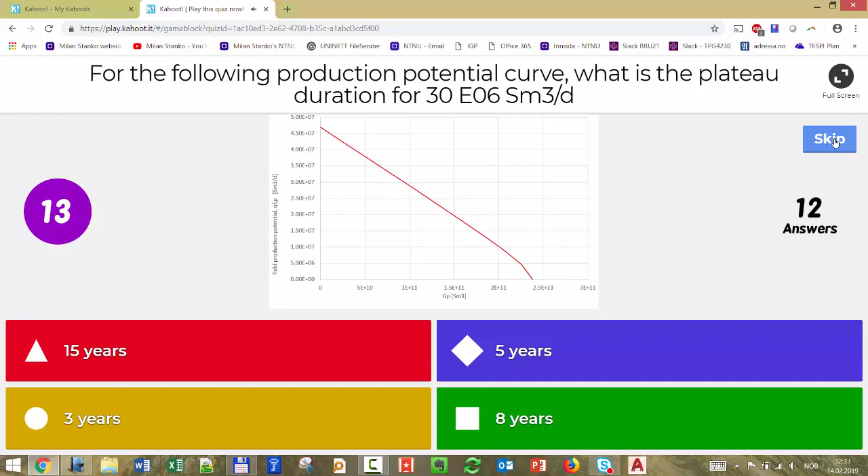Wow, very different results. Okay, so how do we solve it? We have that curve, right? For finding each one of these points, we came to that production. Let's say we produce 5 from the reservoir. We calculate reservoir pressure, and then we run a full open choke, the maximum that system can produce. That gives me that point.

Now I produce a bit more, I have another reservoir pressure, make flow equilibrium, and then I calculate that point, and so forth. I always have to compute for each cumulative production, for each reservoir pressure, the maximum the system can produce. That means the rate that I want to produce, 30 million, is reached when the system has produced this amount, which is like 0.8, 0.9 E to the 11. That's when the system can produce maximum that number.

After that, if I continue producing and reservoir pressure keeps declining, I won't be able to achieve 30 million any longer from that point on. So to find the time, you have been producing that value constantly, uniformly, along all of those years. So you simply divide 0.9 by this number, that gives you the number of days produced, and then to find the number of years, you divide by the number of days in a year. Okay?

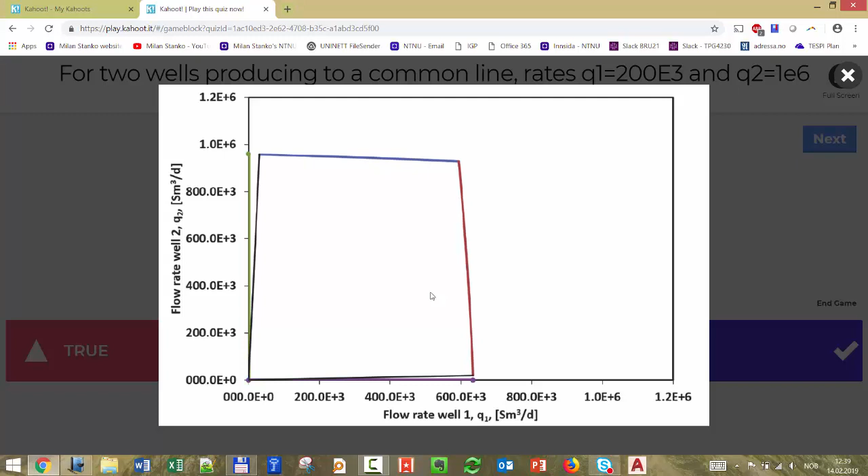Okay, it simply comes from the equation. When the flow rate starts to be too small, you have a discontinuity. You are not able to find a solution for those low rates. That effectively means the well will close when you reach a certain low number. That happens for some systems when you're solving the system of equations, so be aware of that.

Okay, so let's see who was the final winner. Buyan, Sage, and J.A. I don't have any prizes today, so sorry for that.

Okay, so now for the second part, you're going to get an exercise. You should work in groups of, I would say, three. But first, we took a recap Kahoot quiz, and I just want to clarify something that people were a bit confused by: problem 2 of exercise set 2.

You got an equation that was simply the Q production potential of the field, equal to the number of wells times minus M GP plus Q PPO, and you got some numbers for here and here. This is exercise set 2, right? Exercise set 2. Yeah, set 2. That's correct.

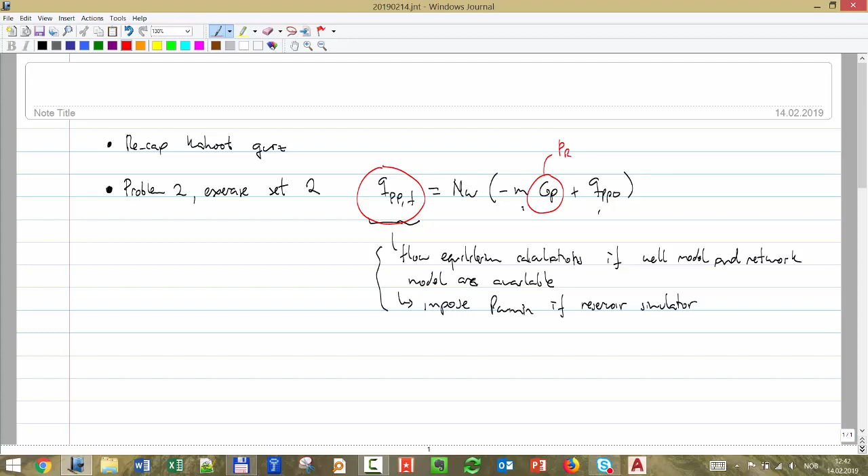You don't have to make flow equilibrium; I have made it already for you. I ran it for a lot of PR and found how much that potential rate was. When you are in the plateau period, the rate of the field will be constant, and you can find the end of the plateau. You already know how to do it, right?

So you have here GP, just the exercise we have made here. Now for subsequent times, you know you're going to be on the line. One way to calculate that, I suggested to some of you, is to take GP. GP at any position i will be GP from the previous time step plus, using the trapezoidal rule, 0.5 times QI plus QI minus 1, times TI minus TI minus 1.

So you start exactly at the end of the plateau. You have time and Q of the field, you made your plot until TP, and then you want to find the rate QI at this time TI. You have Q from the previous step, which for this case will be the plateau. You have the time step you chose.

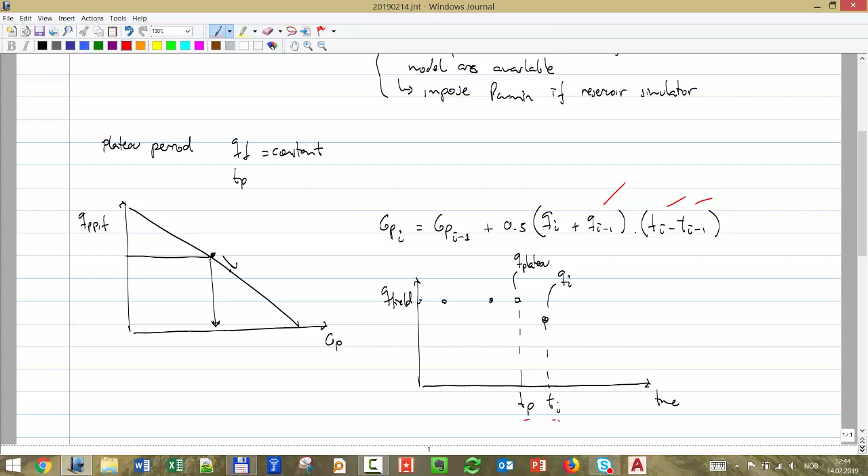You decide: you're doing your calculations every year, or every month. You have how much has been produced, GP minus 1. But now you want to find these two. On top of that, you have another equation, the potential equation, because in this area you always have to be producing at the maximum.

For that, the maximum Q of the field should equal the number of wells times minus M GP plus Q PPO. All of these are given. So you have one more equation for that point, where QI is NW times minus M GPI plus Q PPO. Then you solve that system of equations, one equation here and another here, simultaneously.

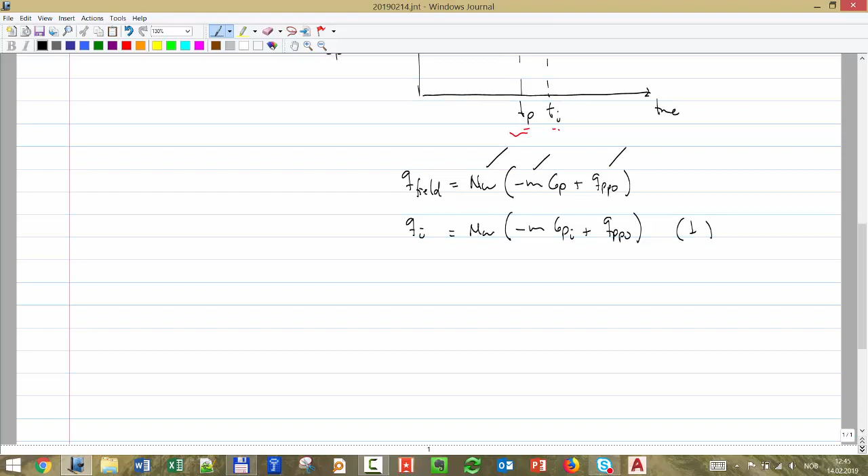Now there is another way you can do it. You can use exactly the same approach we used in problem 1 of exercise set 1. You have time; at some point you have T plateau, and then you have TI.

So you can compute the GP. First you have the rate, right? And for all of these, you will have the plateau. Plateau, plateau, until here. Now you have the GP. Okay?

And for GP, for time I, you can calculate, assuming that you have been producing the previous, so it will be your previous plus Q plateau times TI minus TP. You are assuming that you are producing that throughout the year with the rectangle rule, from the end of the plateau. Even though you are sure it's not so correct because now your rate will be less, it's just an approximation. You're assuming it will remain constant.

With this GP, you're also able to calculate the Q production potential of the field. And you had one column. For that you use this equation. So for 0 GP, you calculate some QPP of the field until you reach a point, right? So when you apply it exactly for this time, what's going to happen? Your plateau rate will be above this potential. So therefore, you should use now, in this time, that potential.

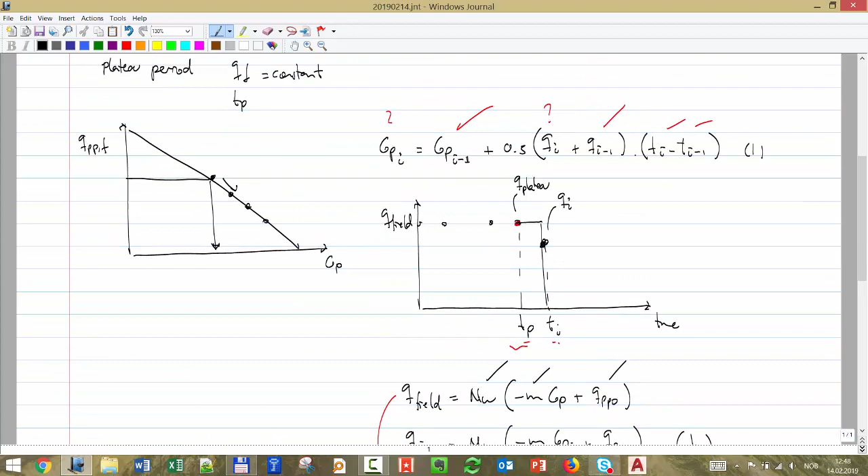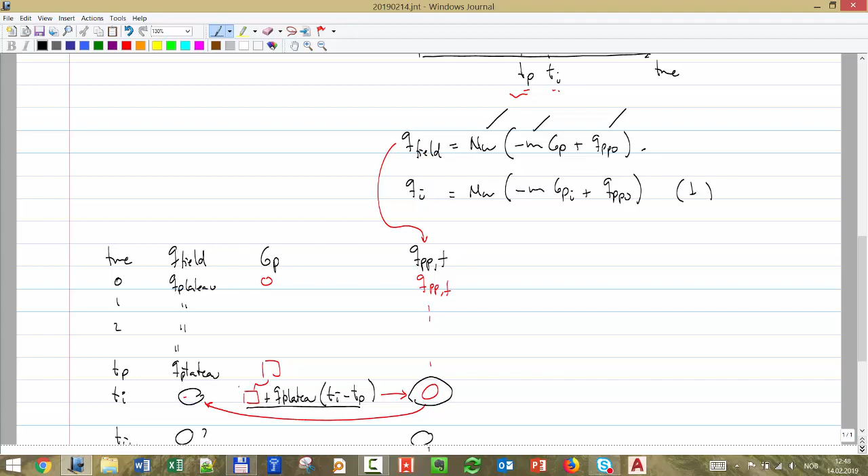You don't have to solve this system of equations. You can just assume that the flow equilibrium calculation, applying the minimum bottom hole pressure, simply comes from this equation. I don't have to solve anything, I just apply that equation. Okay.

With that clarification, we come to the second part of the class. We are going to make an exercise, which is published on my website. Well, you're going to make an exercise. I'm going to help you a bit. And that exercise is part of exercise set 3.

So what we have here is a very complex problem. It has a part on boosting. It has a part on flow equilibrium calculations. It has a network, and it's also in time. So it has all the things we have covered so far in the same problem. So we have to take one step at a time.

What we are looking at here is the Gullfaks South field. You have two templates, M and L. You also have another template called N. We are neglecting that template for now; we say the production is very, very small, so we neglect it, such that we can solve it with Excel.

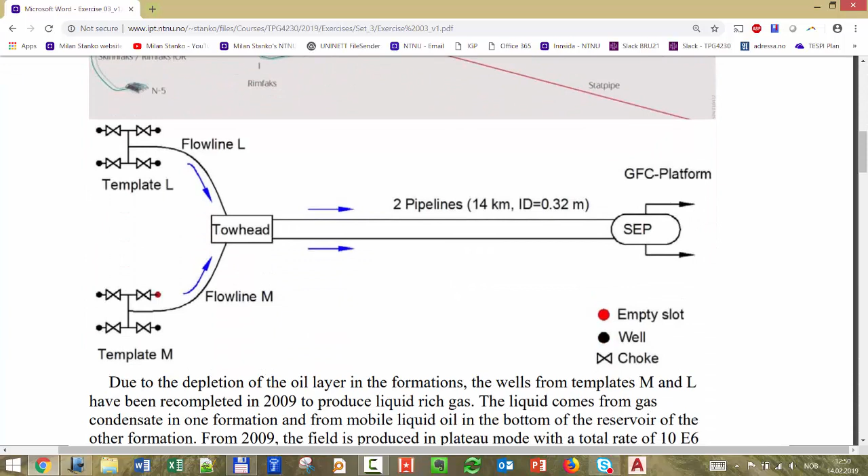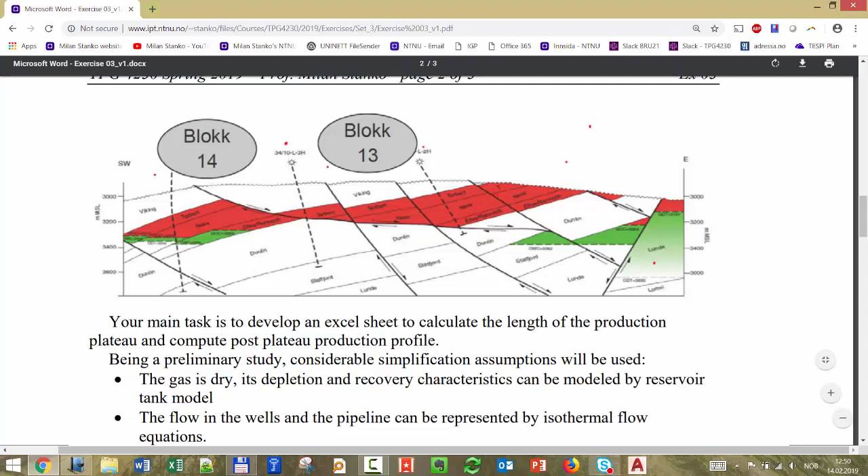And the thing is that these wells were originally oil wells. But with time, the GOR starts to increase, you're producing too much gas, and they decided to convert them to gas wells, gas with some liquid. So if you see here the cross section, you have 2 units split by a fault. Initially the wells were completed in the oil layer, and they were recompleted a bit higher in the gas layer.

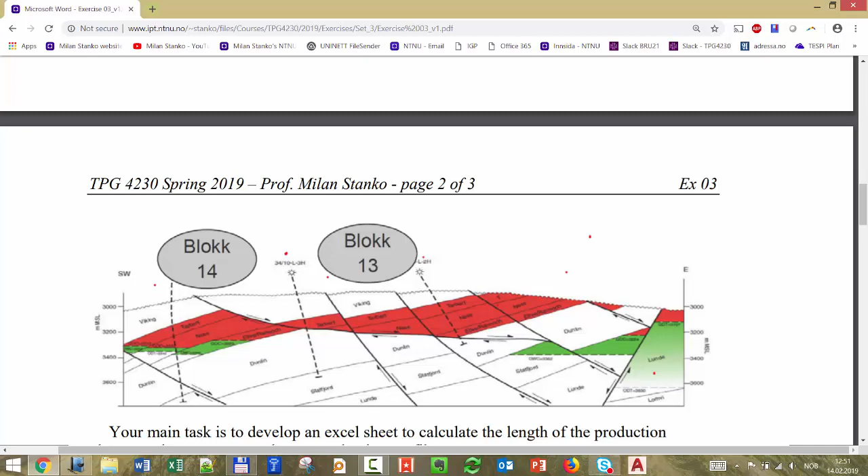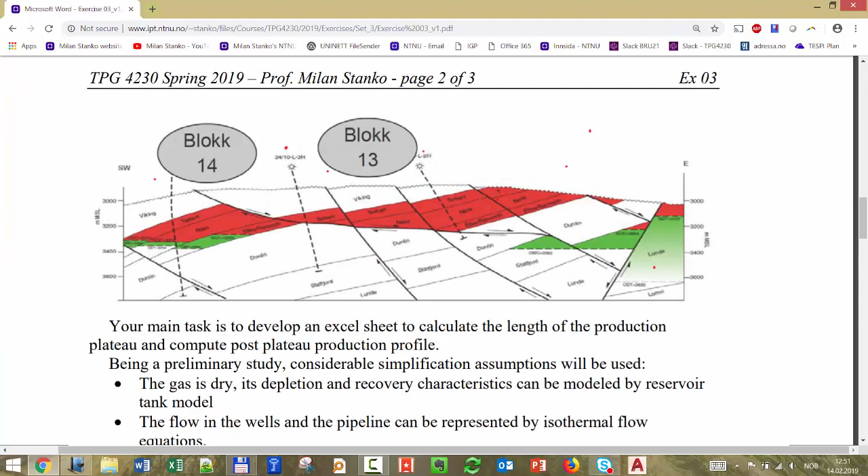And you will start your calculations from there. You have the volume of the gas cap you have in place, and each well is draining from a different unit. Even though it's a very complicated unit, we say these are 2 reservoirs, 2 containers. And the main task is to compute what we are computing all the time, which is the production profile. You can use the same equations, dry gas material balance.

This is all the data. Now you have two reservoirs. So you have to take the volume of each reservoir. You have to take the number of days producing per each reservoir. You have a different number of wells per each reservoir, different initial pressure, different C, tubing, flow line, etc.

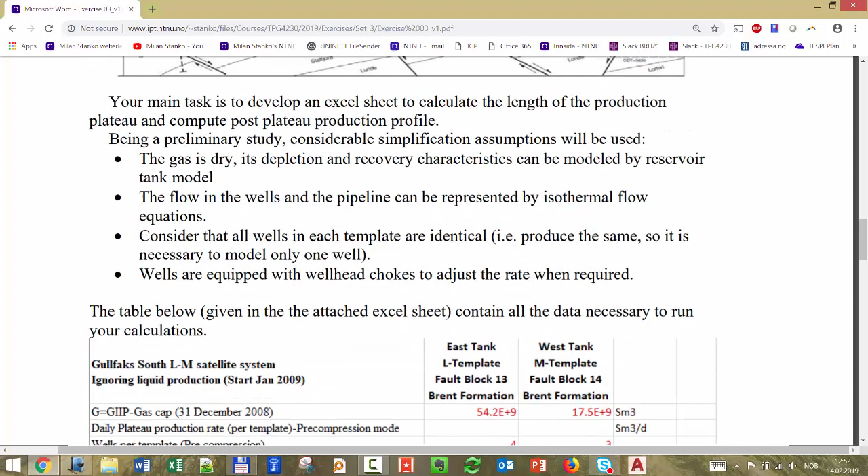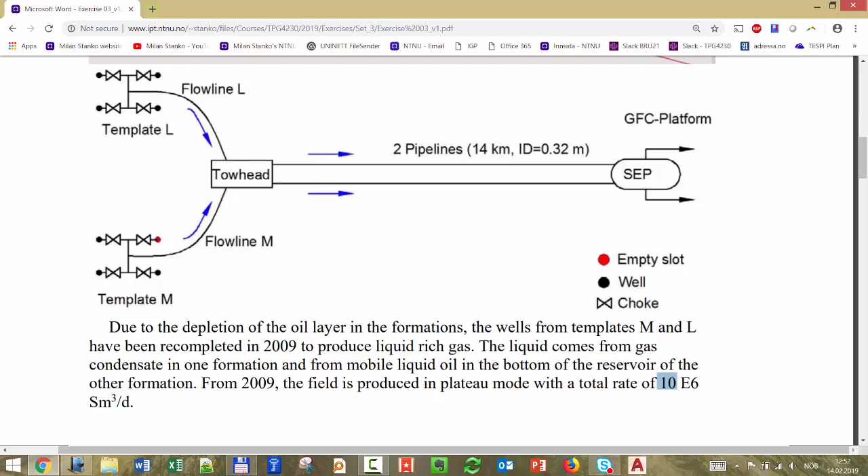Now, there are a few things, so you can go and read. I suggest you have groups of 3, and then you work on the exercise, and I can help you as needed. But basically, if we make a simple sketch of our system, you have here a flow line. I don't need to simulate both. Both are going to be exactly identical, so I can say I have a flow line that is carrying half the rate of the field. If both are identical, there is no point to waste one equation on that. I know the conditions will be exactly the same.

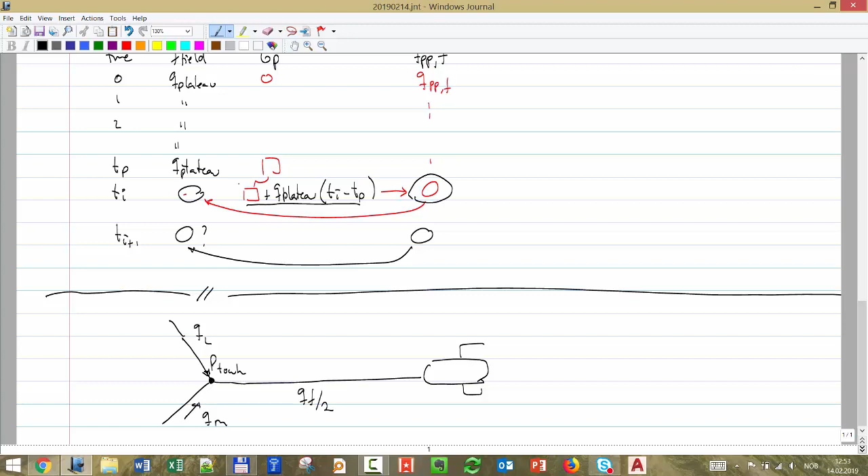So here I have P towhead, and then I have 2 templates, and now the rate won't be the same. Now I have Q of L and Q of M, and I have to find how much that is. And then I have 4 wells, I think, in L, and 3 wells in M. Here we make the assumption that wells are identical within a template. That means the rate on one well will be QL divided by 4, and this will be QM divided by 3. Just to not solve too many networks.

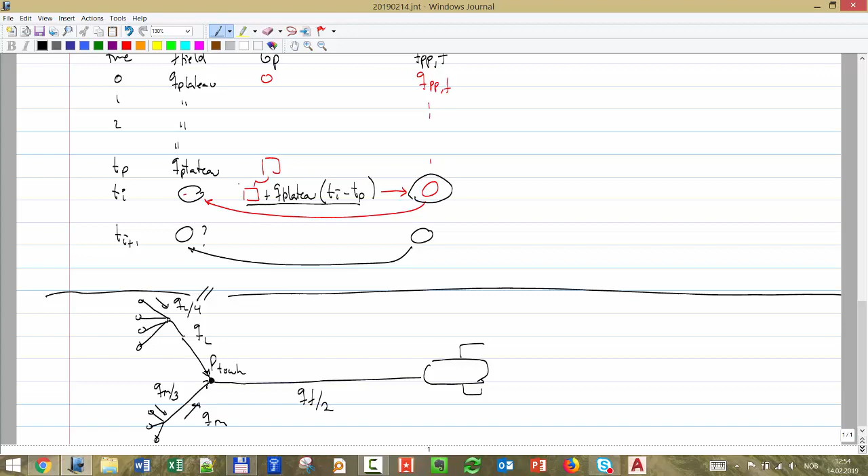Here the main thing we want to calculate is the splitting between these 2 units and how they're going to deplete in time. So we don't know yet how much we're going to produce from every unit, from each reservoir. It's empty. So I suggest that first you run an open choke simulation.

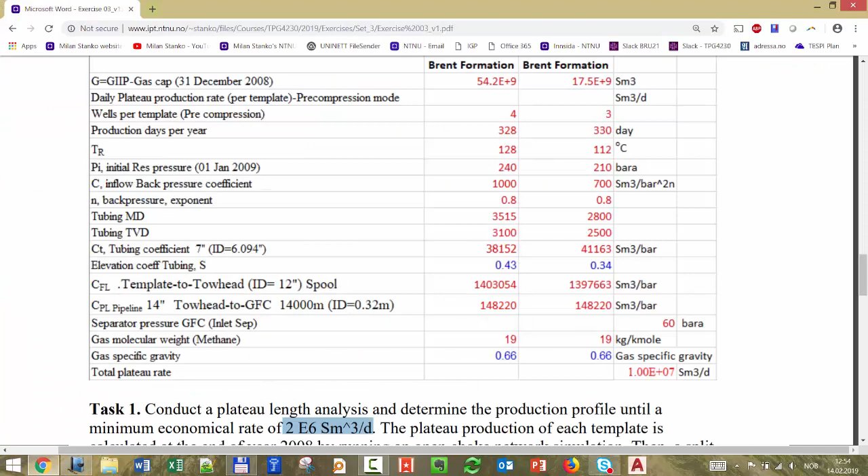Okay. For the plateau production of each template, you have to run an open choke simulation. It should give you a value much higher than 10, maybe 20. You will see how much each template is producing in that case. Maybe one template will be 12, the other 8. Then you calculate a split factor for each template, for each reservoir: let's say 12 divided by 20, and 8 divided by 20. So you calculate a factor for each one of them.

So to estimate how much each reservoir unit should produce in plateau rate, and that's something the field designer does often, they make the decision based on the potential. One often uses the potential. So I calculate at time 0, when I haven't produced any gas. I have been producing that reservoir for a long time, but I haven't produced any gas. At time 0, run a flow equilibrium calculation with open choke.

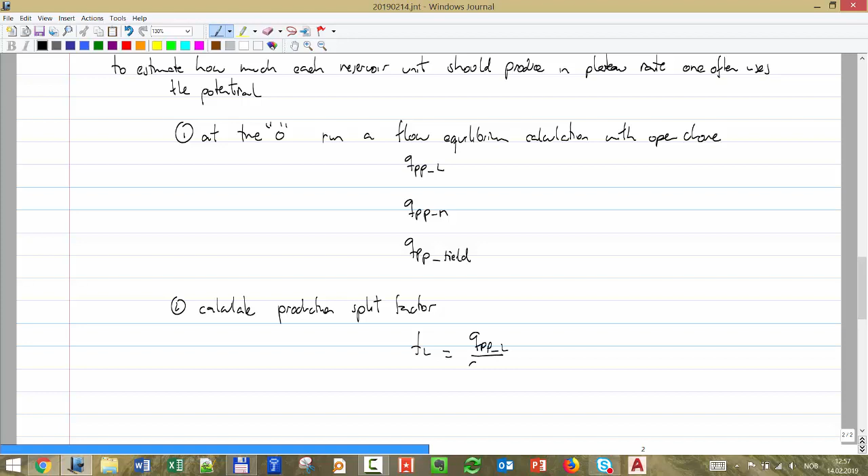Then I calculate the production potential of template L, the production potential of template M, and the production potential of the field, which, if I want to produce 10, should be much larger than 10. That's the first step. The second step is to calculate the production split factor, where for L it will be QPPL divided by QPP of the field, and for M it will be QPPM divided by QPP of the field. And I'm going to get a factor.

Let's say according to the productivity of each template, one will be 30%, the other 70%. So the third step is to calculate the production split at plateau rate. Q plateau of L will be the desired Q plateau of the field times FL, and Q plateau of M will be the Q plateau of the field times FM. If I produce at open choke with no restriction, I get that splitting, so I use the same splitting when producing at plateau rate. That's how you find out how much each template is producing initially.

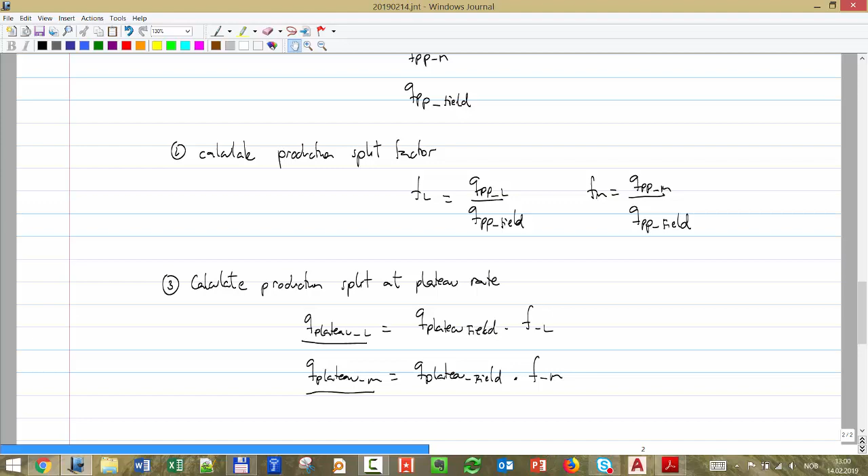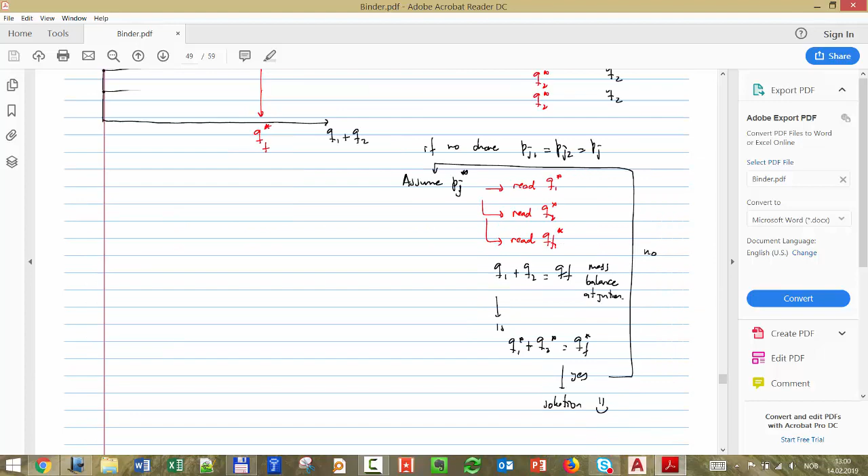And now we go to this. To solve this problem, you think about network, you get scared, I have to solve a system of equations, but remember this very important lecture. If we are at plateau rate, if the delta P of the choke is positive, I simply calculate with the rate the wellhead pressure of template L. With the rate, I calculate the wellhead pressure of template M. And with the rate, I calculate the towhead pressure, and then at the template the required and the available, and I compare.

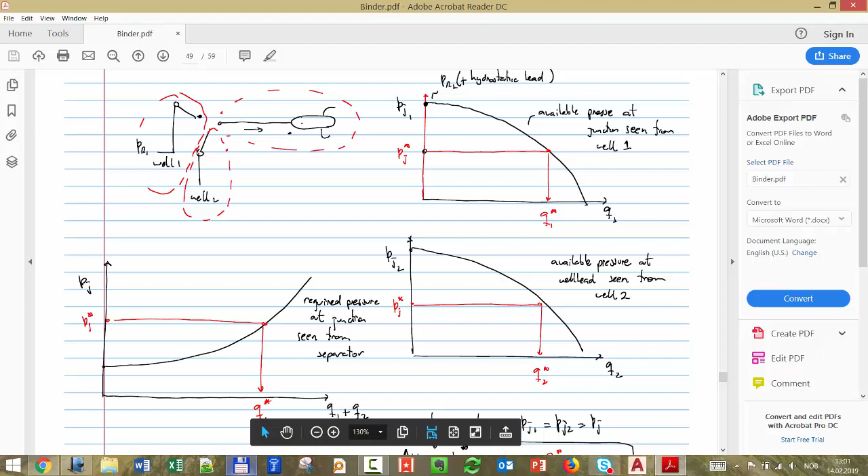If one is greater than the other, that means I can produce the rate. I don't have to do anything else. I have verified that I have more energy than what I need. The problem comes if it's not, I have to run equilibrium, if I have less energy than what I need. So for that you got an Excel sheet that you're going to use, and it's very similar to the one for Snow White.

But now you have two reservoirs. So you have the rate of the template, the rate of the well on that reservoir, the GP, how much you have produced from that reservoir, the recovery factor, the C of that reservoir, reservoir pressure. So with that rate, you fix it. Let's say it's initially 6. You have reservoir pressure, you calculate bottom hole pressure, and then you calculate wellhead pressure. You stop.

Now, this you don't know yet. That's the available, and this will be the required. This one I calculate from the reservoir. This one I have to calculate from the separator. Now I go for the second, M. I have again all the things for M. I go reservoir pressure to bottom hole pressure to wellhead pressure, and I stop. And now, it's a bit long Excel sheet.

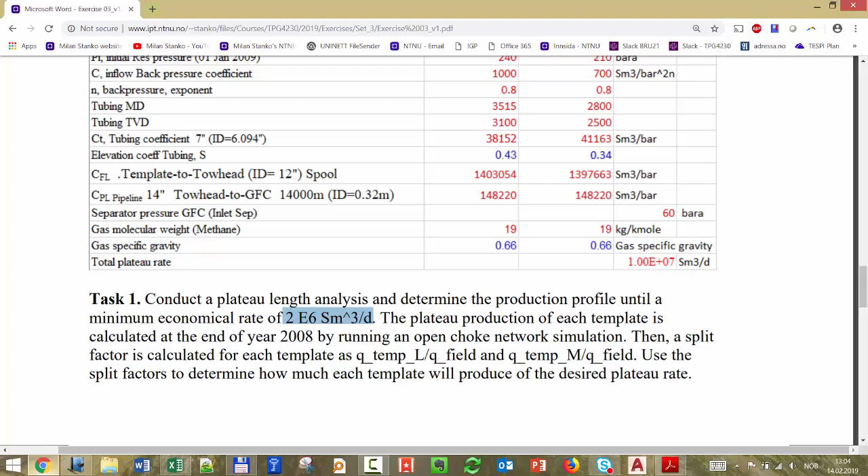So not to confuse you anymore, I suggest you start by getting in groups and reading closely the exercise, and then maybe after 20 or 30 minutes, we take another joint session if you have any questions. Okay? So let's do that now.

You go to File, Options, on Formulas, okay? You have to be sure that it's set to automatic, because I think some of you might have manual calculation. That means that every time you change a value in the Excel sheet, it's not going to recalculate automatically. If you have a very heavy Excel spreadsheet with many calculations, then people usually prefer to do it manually. They press F9 and then everything gets calculated. So for you, just change it to automatic, okay?

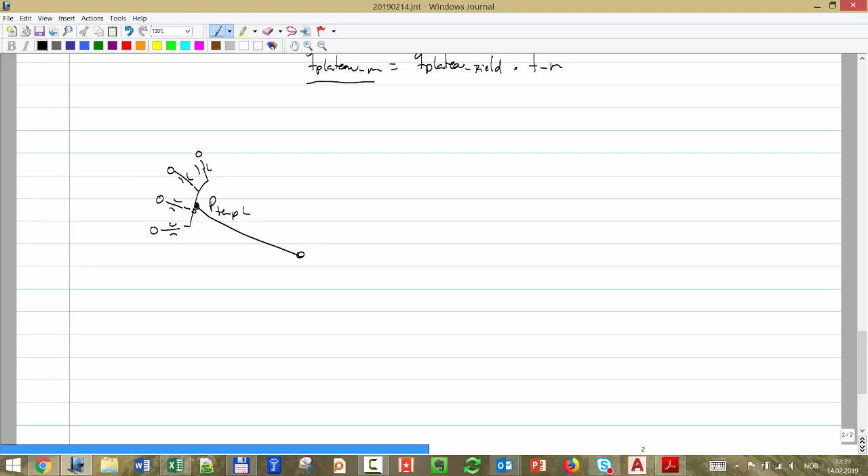So what we are doing here, we have a choke. Remember, the choke is per well. We don't have a choke per template. The choke actually is per well. And then all of them go to a common point. We have 4 in the case of template L. Here we have a common point called P template of L. Then that goes with a flow line to a point called P towhead. And then I have these 2 lines, and I can just look at one, with QF divided by 2.

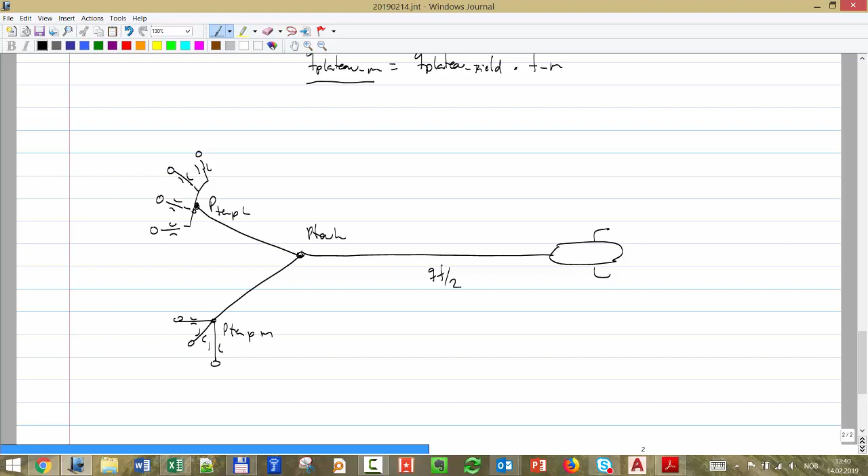And then I have the same thing. I have a point here, P template M. And then I have these 3 wells. Each one of them has a choke. Okay. So what you have to define first is an equilibrium point. That's the first thing you have to do when you look at that network. You say, I want to solve it, and I have to define an equilibrium point.

As I mentioned, this is very similar to the 2-well case that we have done in class before. You have two guys producing to a common point. And if this choke was closed or had some delta P, that creates a problem, right? But they are fully open. We are running a simulation with fully open choke. Therefore, this is exactly the same as that case. So I decide to use this point as my equilibrium point. And with any equilibrium, I have to get to that point from all the bounds.

So I go from the separator all the way here, from the downstream bound all the way here. For that I have to use this equation, line P1. I have P2 here, and I want to calculate P1. Then you move from reservoir pressure, bottom hole pressure, you move to wellhead pressure, and the choke is open, so there is no pressure drop. You can continue all the way here.

Here I have to use the rate of one well in M. Here I have to use the rate of the template, M, until I reach that point. So I move bottom hole, wellhead, and then wellhead junction, towhead. So I do that from M, from L. For this one I have to use IPR, I have to use TPR, and I have to use flow line, FPR. And all of them I want to calculate to the condition downstream. I'm moving with the flow.

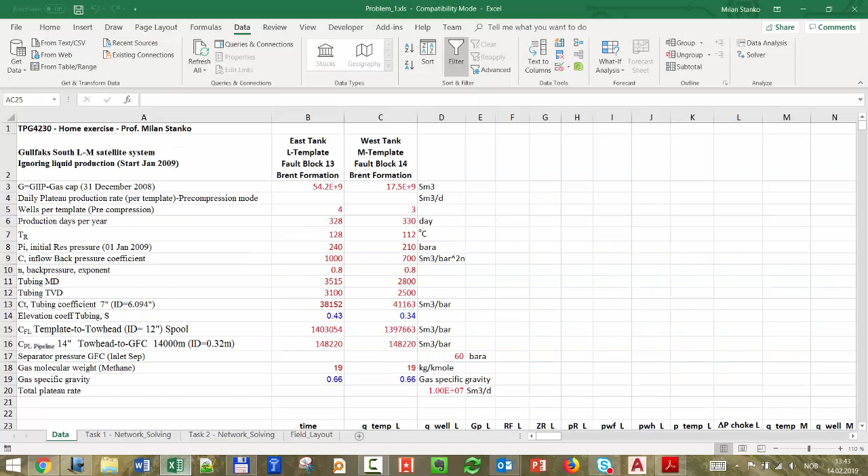So I don't need anything else. I need to assume the rate and then change these rates until these 3 numbers are the same. That's how we start the problem. Define the equilibrium point and then define what do I have to change to achieve what. Now we go to the sheet. And here I'm going to erase, and I'm going to try to solve it very quickly.

I told you, the solver is using a Newton-Raphson type method to find the solution. So you can give it the rate, but with the rate you have a problem. If you have an overshoot, let's say assuming a very high rate, you will have the square root of that quantity, so you're going to get a value error. So that's why I suggest you start with bottom hole pressure. And we start with the bottom hole pressure very close to reservoir pressure, 220, and let's say 200.

Then we move from that point. We have bottom hole pressure. We calculate the rate with the IPR equation from each well. Here we're talking on a well level. IPR Q, and that will be C, N, PR and PWF. That will be for a well in template L, and that's for a well in template M.

After I do that, I still move on the well, so I still have to use the rate of the well, but I move all the way to the wellhead for both. So for that I use tubing. Which equation of tubing do I use? I have the pressure at the bottom of the tubing. I have to calculate the pressure at the top of the tubing, wellhead, P2. CT, S, P1, and Q.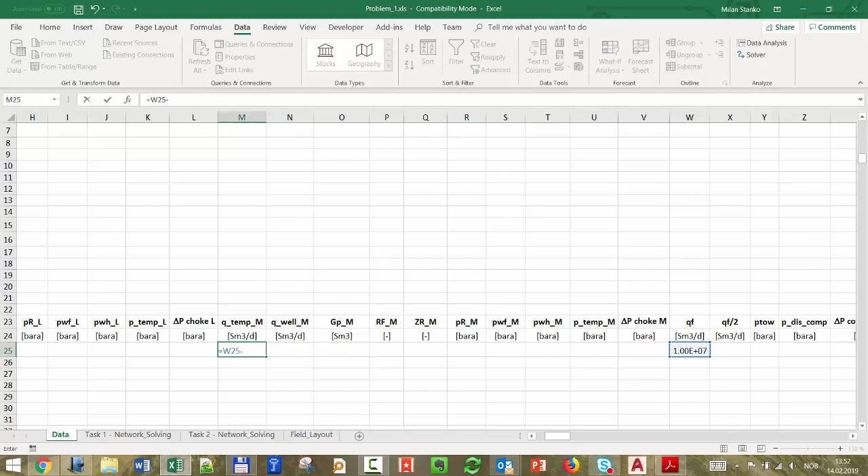Okay, Q of the field is 10 million, and the Q of template M will be the difference between this guy and that guy. Hmm? Yeah, sorry? But now you're at potential, right? You're not at plateau. No, I'm at plateau. Remember, if I was at potential, I would be producing 22.

Okay? I don't want to produce 22. I want to produce 10, much lower than that, much lower than my potential. For that, I will have to choke. So you use the split factor at the initial. You use the split factor calculated at potential to split the production during the plateau period.

And we will see later on more detail, but what I told you, this indicator tells you how strong one template is compared to the other. Okay, this tells you that this one is 70%, or is stronger than this one. Therefore, it should produce more in the plateau. Does the split factor not change as you produce? Yeah, that's a more advanced calculation. We are assuming here it's constant, but it will change. It's better if you change that factor for every time step.

Because what if you had both wells going at potential until they reach the field plateau? Mm-hmm. Because if they are at potential, then you would get the field potential, right? So if both go at potential, you really cannot do much. Okay, the potential is simply if they are going to follow one decline line. You cannot really control that decline. But if you are able to choke, then you're able to control how they will decline. Okay? So you would want to find the split factor at the field potential.

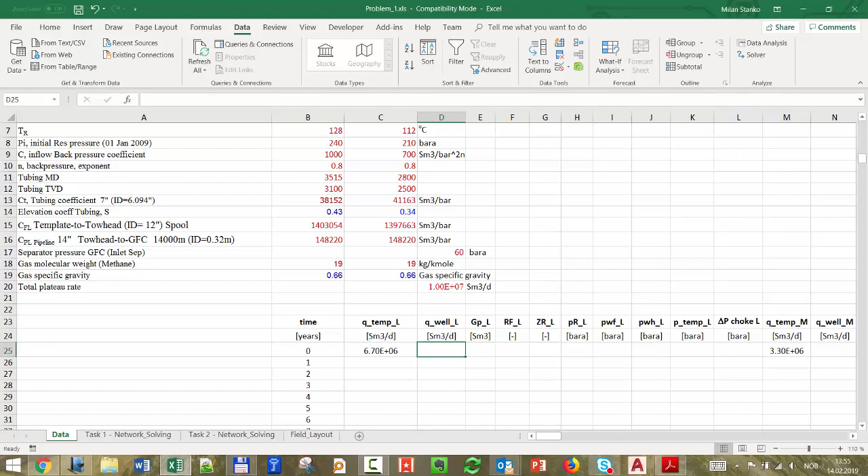You can find out what is the pressure, available wellhead pressure. You can find the required. Here, remember, we are changing the equilibrium point. When we make that calculation in plateau, this one will be different than 0, and this one also. So what we are doing here, we are putting the equilibrium points here, right? We have this rate, we have this rate, we can go all the way from here to here, and from here to here. We calculate that pressure.

And then we go from here to here, and here to here, calculate that pressure, and then we compare. If this one is bigger than this one, I can produce the rate. If not, I have to use that again. Okay? So let's do that tomorrow.